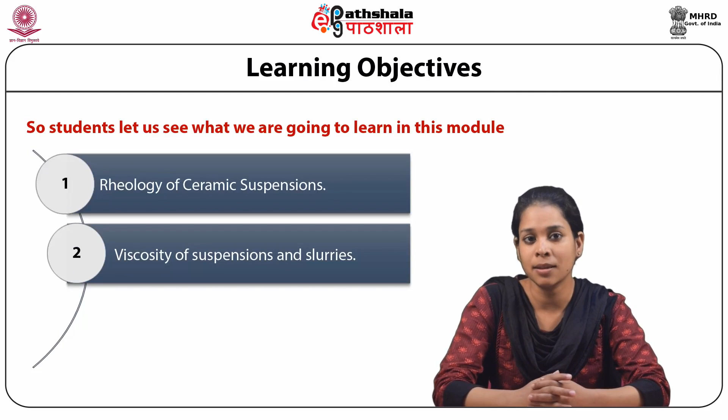So students, let us see what we are going to learn in this module. First we will discuss rheology of ceramic suspensions. Then we will discuss viscosity of suspensions and slurries. And lastly, we will discuss ceramic forming by casting.

Before moving into this module, we discussed in the previous module regarding dry pressing. Dry pressing is a common method to form ceramic shapes, where dry powder containing small amount of binder is used. The ceramic shapes can also be produced from several other techniques.

One of them is the casting process, in which slurry of ceramic particles is used to cast the required shape in a porous mold. This technique can produce complex shapes as well as massive refractory shapes, and it is also used for advanced ceramics because of the ability to control agglomerates and achieve uniform mixing of all the additives.

Other than that, there are various techniques available for shaping a paste of ceramic powder, including extrusion and injection molding. These forming techniques are discussed in this module and we will discuss them one by one.

First we will talk about rheology of ceramic suspensions. Rheology concerns itself with the flow and deformation of materials. It is of great importance in the casting process. The parameter most commonly measured in rheological measurements is the viscosity.

In ceramic processing with suspensions, slurries and pastes, it is essential to know the rheology. Rheology is important in processing as well as in operations such as storing, pumping, transporting, mixing, etc. of a ceramic system. A ceramic system such as suspension or slurry is a complex system. The rheological behavior of such a system depends upon the particle size, concentration of particles in the suspension, the interaction present between the particles, and other factors.

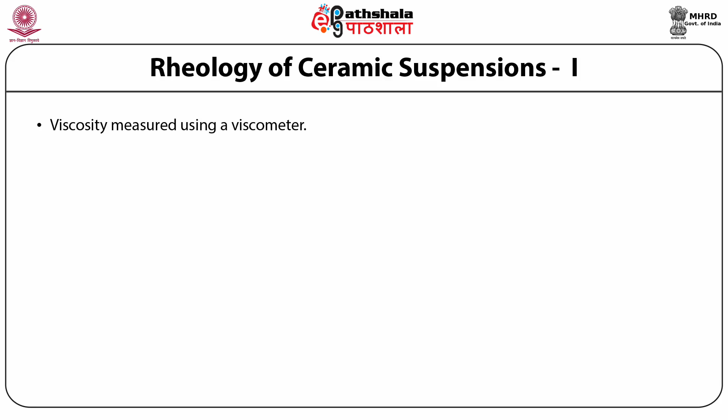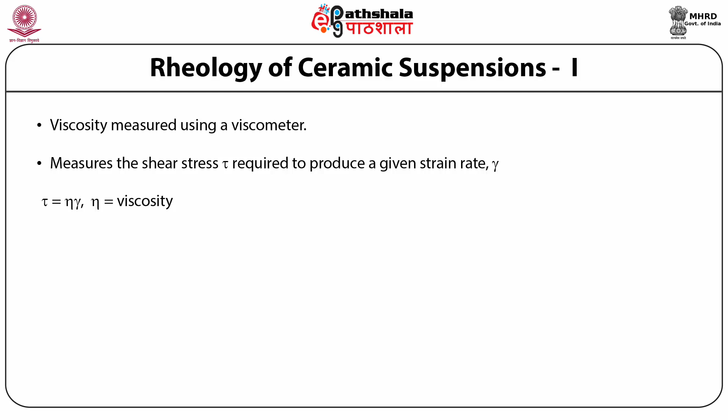There are different types of rheological behavior in ceramic suspensions. The viscosity of a suspension is measured using a viscometer. The shear rate used for measuring viscosity can be varied. For a given shear rate, a shear stress is applied by the viscometer. The ratio of the shear stress to the strain rate is called the viscosity, given as tau equals eta gamma dot, where tau is the shear stress and gamma dot is the strain rate.

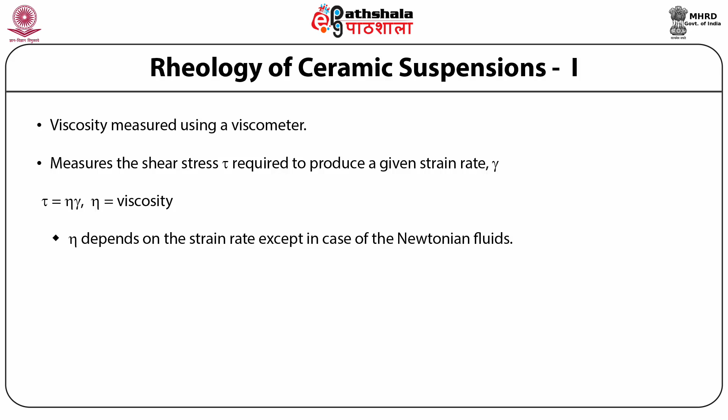It should be noted that the viscosity eta is generally a function of the strain rate, except in one case, which is discussed in the next slide.

Now, the rheology of ceramic suspension can be Newtonian type also. The Newtonian viscous behavior is discussed here. When the shear stress is directly proportional to the strain rate at all strain rates, and the constant of proportionality, the viscosity, does not change with strain rate, then the behavior of the fluid is called Newtonian viscous behavior. In this case, a plot of strain rate versus stress is a straight line. Such behavior is found in pure liquids and in dilute suspensions.

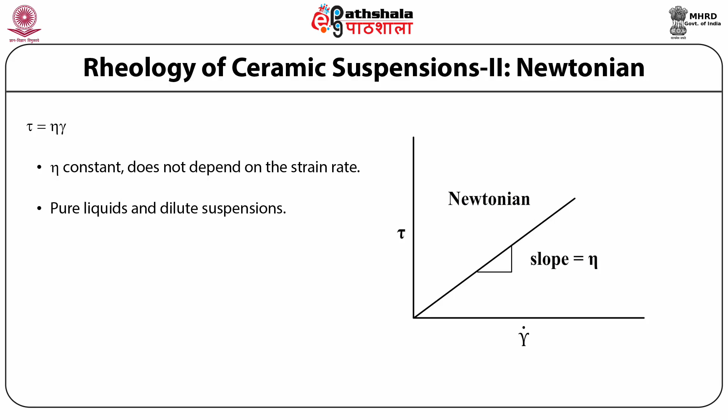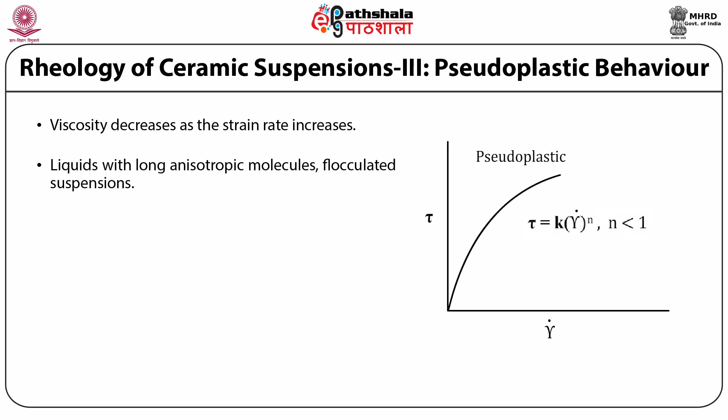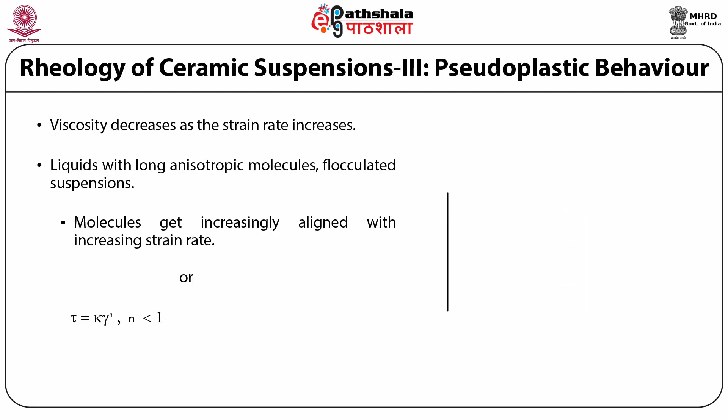This behavior is found in liquids with long anisotropic molecules, suspensions with long particles, and in flocculated suspensions. As the shear stress increases, the molecules or particles get aligned in the flow direction and the strain rate increases. This behavior can also be described by the power law, stated as tau equals k into gamma dot to the power n, where n is always less than 1.

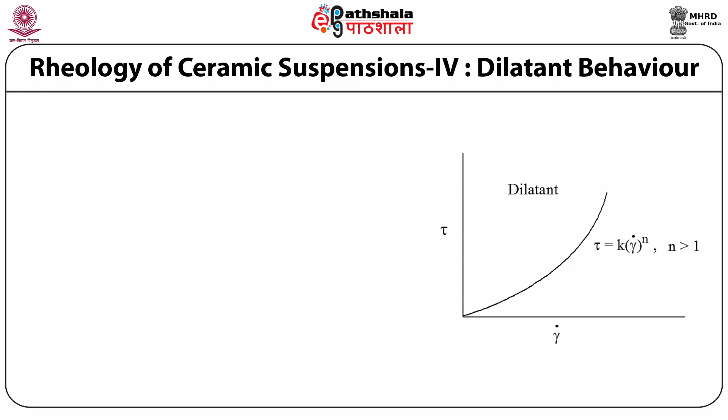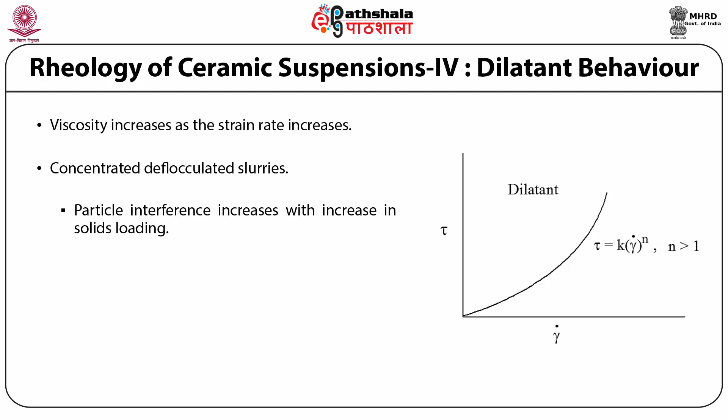Now the next behavior is dilatant behavior. Here the apparent viscosity, eta A, increases with increasing strain rate, so that the slope of the strain rate versus shear stress plot increases with increasing strain rate, as can be seen from this figure. This behavior is characteristic of concentrated deflocculated slurries. With increasing strain rate, the particle interference increases, leading to an increase in the viscosity. This behavior can also be described by the power law, tau equals k into gamma dot to the power n, with n greater than 1.

In all the cases which we have mentioned earlier, sometimes the plot does not start at the origin but starts at a finite value of the shear stress.

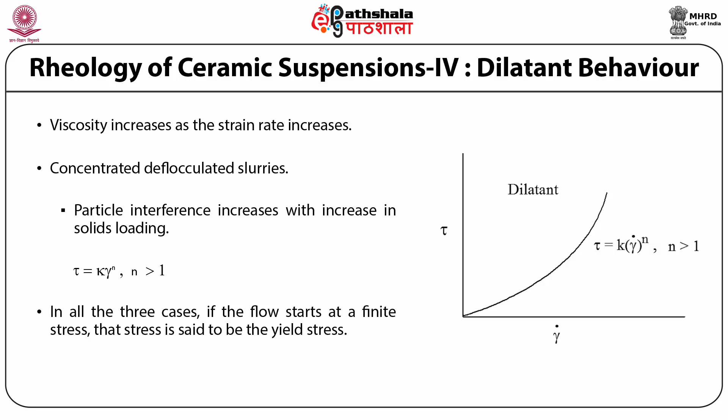The strain rate remains 0 until the shear stress increases above a certain value. This value of shear stress is called the yield stress.

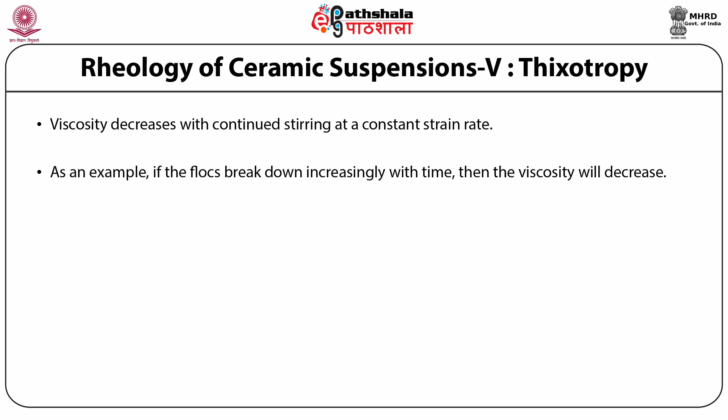Now the term thixotropy. What is thixotropy? Thixotropy is the decrease in viscosity with time while stirring at a constant strain rate. An example is flocculated suspensions, in which the flocs break with time during stirring, and if the flocs break down increasingly with time, then the viscosity will also decrease.

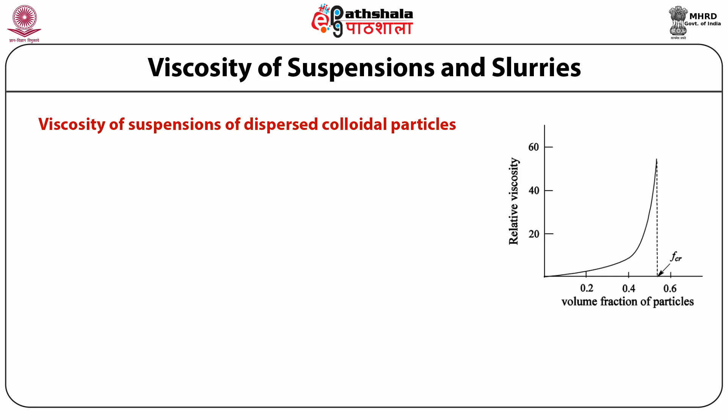In this case, a relative viscosity eta R can be defined as the ratio of the viscosity of the suspension to that of the pure liquid, given as eta R, the relative viscosity, equals the ratio of eta suspension and eta liquid.

For a very dilute suspension of non-interacting spheres in a Newtonian fluid, the relative viscosity is given as eta R equals 1 plus 2.5 times F, where F is the volume fraction of the particles. The increase in viscosity with increasing F is caused by the dissipation of energy as the liquid moves around the particles.

This equation is known as Einstein's equation. Now, for non-spherical particles, the constant in this equation, eta R equals 1 plus 2.5F, the constant is more than 2.5. It will not be 2.5.

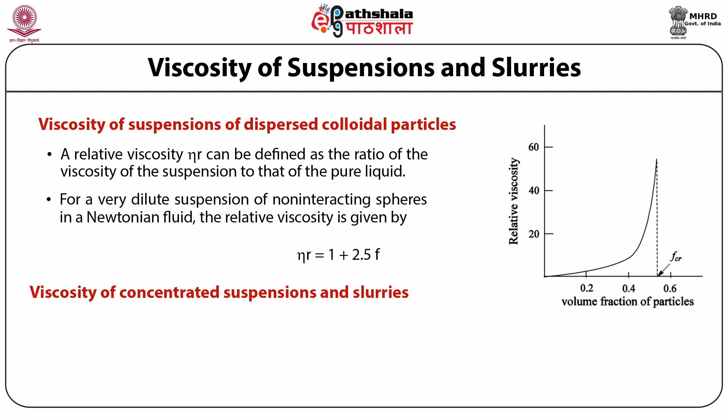Now we will discuss the second case, viscosity of concentrated suspensions and slurries. The equation described above for relative viscosity is valid for dilute suspensions. When the concentration of particle is greater than 5 to 10%, the interference between the particles causes the viscosity to increase rapidly.

The behavior of concentrated suspensions and slurries can be described by an empirical equation given as eta r equals (1 minus F divided by FCR) to the power minus K times FCR, where FCR is the critical packing factor at which the flow is blocked and K is a parameter.

The behavior can be seen in this figure. For an aqueous suspension of latex spheres of diameter 0.7 micrometer, it was found that K is 2.7, and FCR is 0.57 to 0.68 depending on the shear rate.

The same expression describes the behavior of slurries which may have particle size distribution ranging from colloidal to coarse particles. So a simple equation can be eta r equals 1 minus F to the power minus K. This equation is used sometimes.

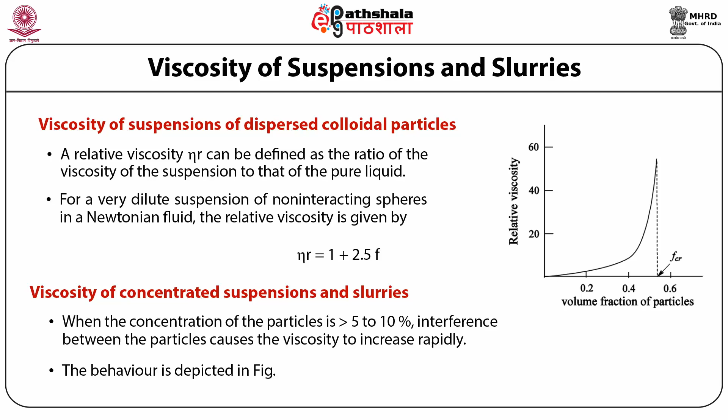A dilatant behavior can also be observed in concentrated slurries due to mutual particle interference, especially where a high repulsive interaction is present. A dilatant behavior makes the pumping and handling of the slurries difficult.

Now we will discuss the effect of the state of dispersion on viscosity. The viscosity increases as an initially dispersed system becomes more and more flocculated. An example is shown in this figure where the viscosity is plotted as a function of pH.

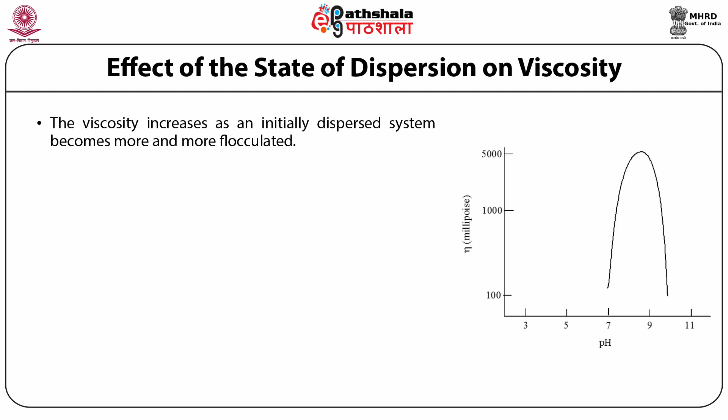Near the isoelectric point, the aggregation of the particles occurs. The increased torque required for this causes an increase

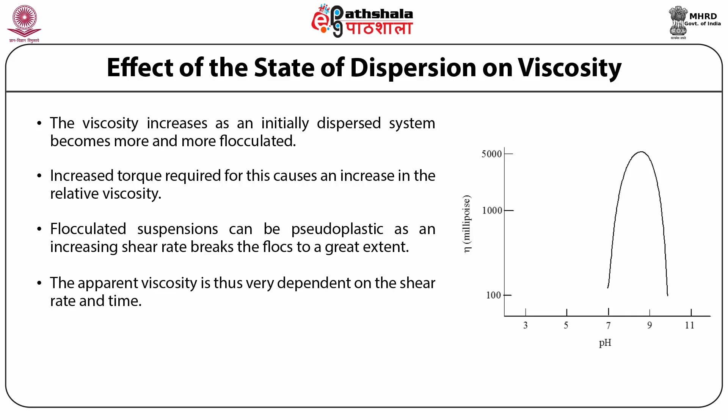in the relative viscosity. The flocculated suspensions can be pseudoplastic as an increasing shear rate breaks the flocks to a great extent. It can also be thixotropic if more and more flocks break with continued stirring. The apparent viscosity is therefore very much dependent upon the shear rate and time.

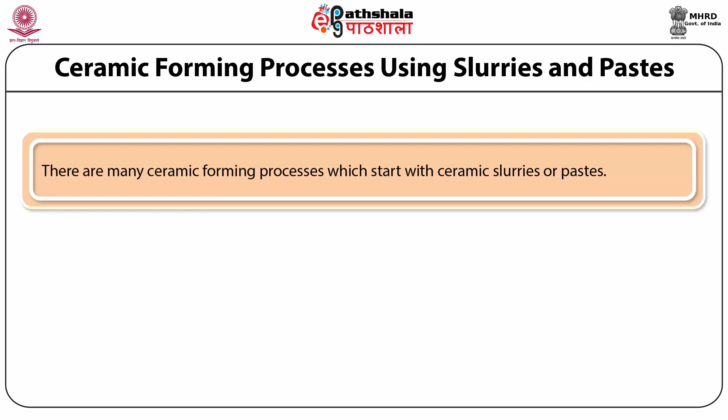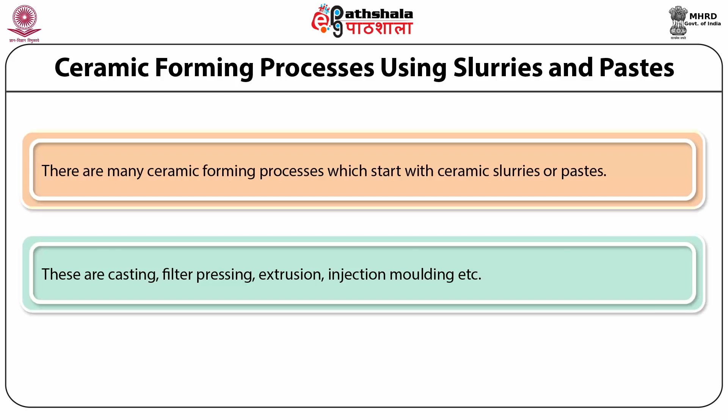Now we are directing towards the ceramic forming processes using slurries and paste. There are many ceramic forming processes which start with ceramic slurries or paste. These are casting, filter pressing, extrusion, injection molding, etc. We will discuss all of these one by one.

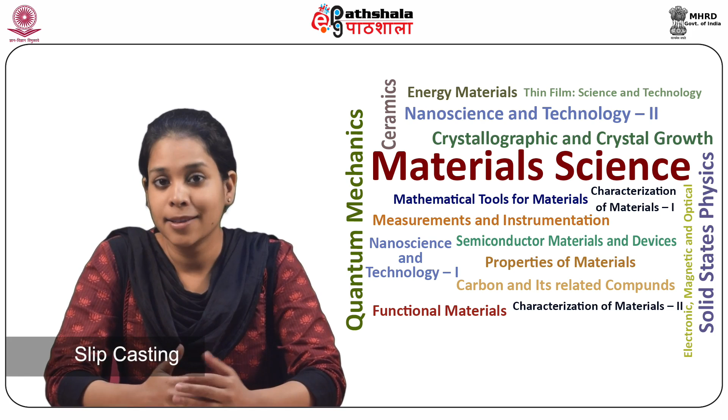So here comes slip casting. Slip casting is a technique used for manufacturing chemical porcelain ware, refractories having complex shapes or massive in size, sanitary wares, porous thermal insulations, bone china and so on.

Slip casting is also used for high performance ceramics with complex shapes because of the ease of controlling the agglomerates, better mixing of the additives in the slurry, and low investment.

The process essentially consists of preparing slurry of the ceramic to be used and pouring it in a porous mold. The liquid is slowly sucked out through the pores of the mold due to capillary action to the external surface where it evaporates. A cake is formed adjacent to the internal surface of the mold.

The remaining slurry can be poured out of the mold after the required thickness of the cake has formed. This complete process is called drain casting. So we will start with slip casting.

Alternatively, the slurry is not poured out and the casting process is allowed to proceed to completion, at the end of which a solid body with a pipe running through its center is produced.

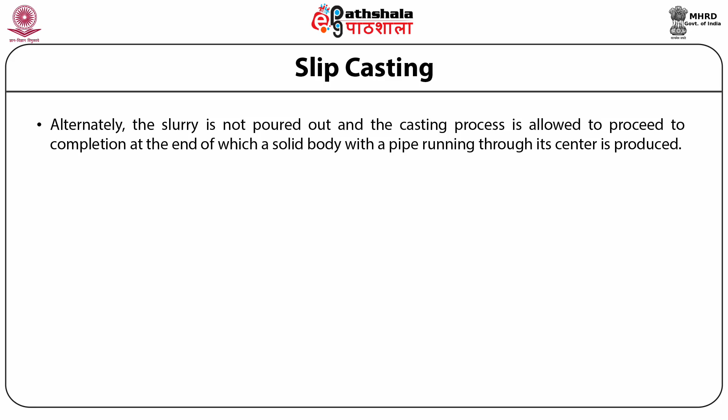After the casting process is complete, the separation of the cast from the mold occurs due to the drying shrinkage of the cast. It may also be effected by blowing air through the mold from the outside.

The casting time may range from 1 hour for a porcelain part with a thin wall to several weeks for a refractory cast of thickness of 30 centimeters. The casting time may be reduced by pressure casting or vacuum casting.

The slurry of slip casting can be formulated very carefully to achieve several objectives. These include: the casting rate should be reasonably fast, the cast should have adequate strength for handling subsequent to drying after removal from the mold. Another is the level of porosity in the cast should be as desired. And the last one is the cast should have uniform thickness.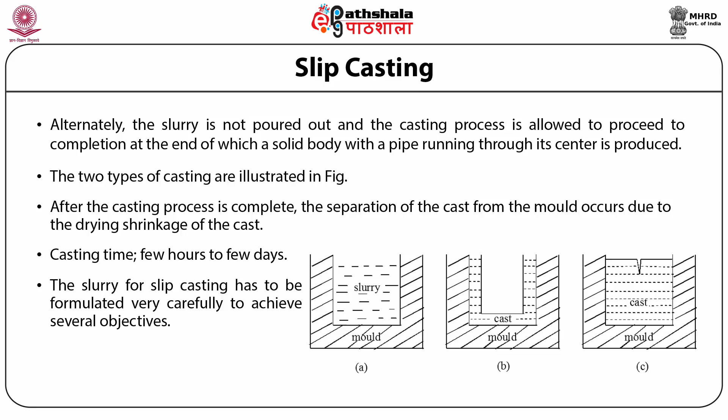Now there are some considerations which we should keep in mind in slip casting. Some factors considered while formulating a slurry for slip casting are: first, a large amount of fine particles in the slurry will produce a cake that has low porosity, and so the casting rate will be slow and non-uniform. To avoid this, the slurry can be partially flocculated.

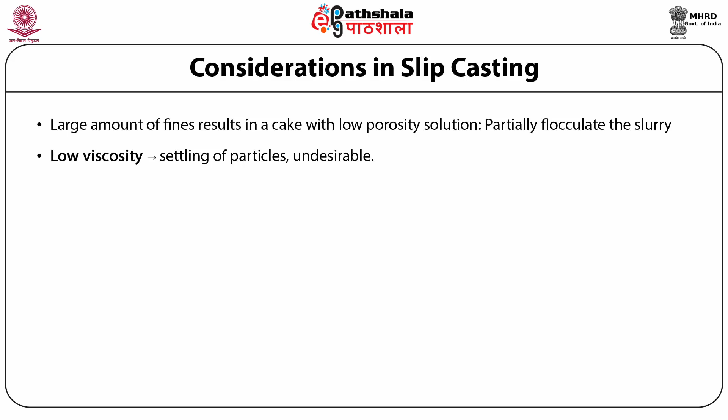Second, if the viscosity is too low, the particles would tend to settle to the bottom and the available casting time would be small. In slurries with high viscosity, larger particles can be accommodated.

Third, it is desirable to keep the solid loading in the slurry as high as possible so that less liquid has to be removed. The solid loading depends on the thickness of the double layer around each particle. In a highly deflocculated slurry with fine particles, with each particle having a double layer, the particles cannot be brought closer than a certain distance, and so the solid loading is limited.

Fourth, for drain casting, the viscosity should be low, that is less than 1 Pascal second, while it can be greater than 100 Pascal second for solid casting.

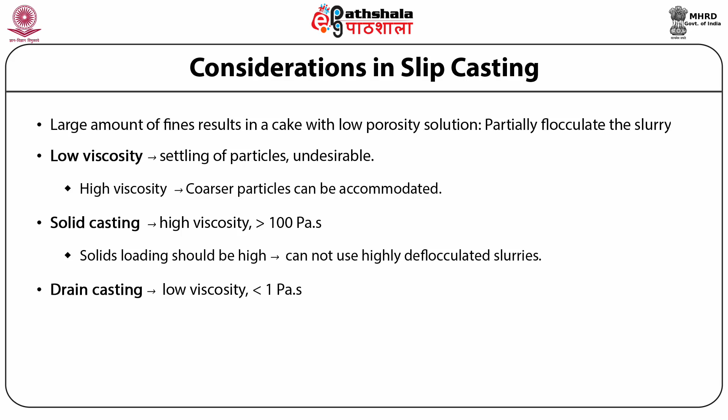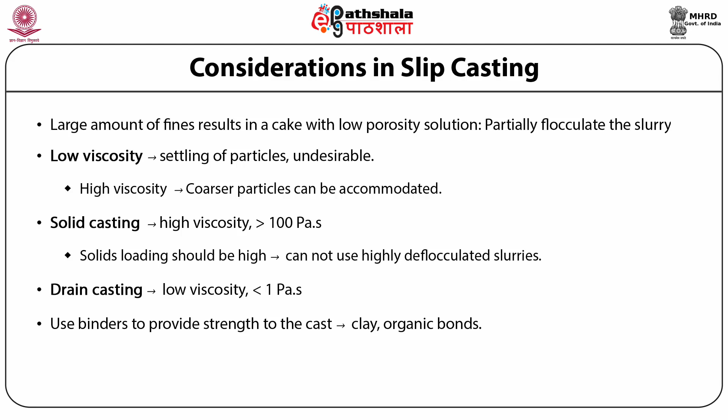And the last one is the binders are used to provide strength to the cast. Most often, clay is used as a binder. Organic binders of medium molecular weight or inorganic binders are also used. A mixture of binders can also be used instead of clays.

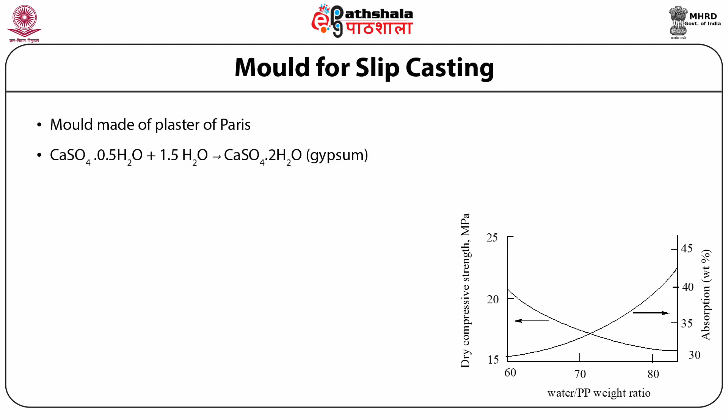The mold is commonly made from plaster of Paris, that is PP, which is partially hydrated calcium sulfate. On addition of water, it gets hydrated to gypsum, and the equation is written as follows: CaSO4.0.5H2O plus 1.5 times H2O gives CaSO4.2H2O, which is gypsum. The gypsum forms in the form of interpenetrating needles and plates and produces a mold with adequate strength.

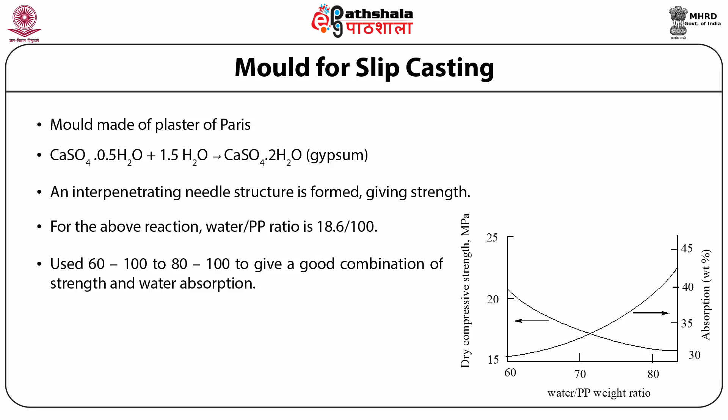The water to PP ratio according to the above reaction is 18.6 by 100. So a range of 60 by 100 to 80 by 100 is used to produce the mold to give adequate porosity. The variation of the strength of the mold and its water absorption capacity with water to plaster ratio is also shown in this figure.

The liquid being removed from the slurry has to pass through the cake which forms on the wall of the mold. The cake acts as a filter. The uniaxial flow rate through a filter is proportional to the difference in pressure, that is delta P, across the filter with thickness L and cross-sectional area A. So the equation becomes Q equals

Kd times A times delta P divided by L, which can also be written as Kp times A times delta P divided by eta times L, where Kd is the Darcy permeability coefficient and eta is the viscosity of filtrate. Moreover, Kp is the specific permeability.

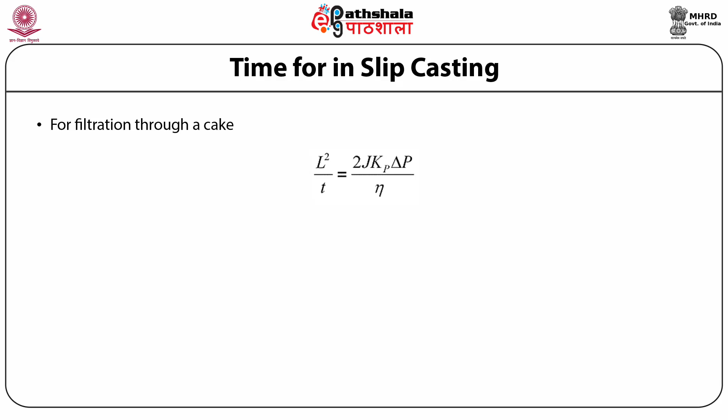For the filtration through a cake, one gets the formula as L squared by T equals 2 times J times Kp times delta P divided by eta, where L is the thickness of the cake produced in time T, J is the volume of the cake per unit volume of the filtrate.

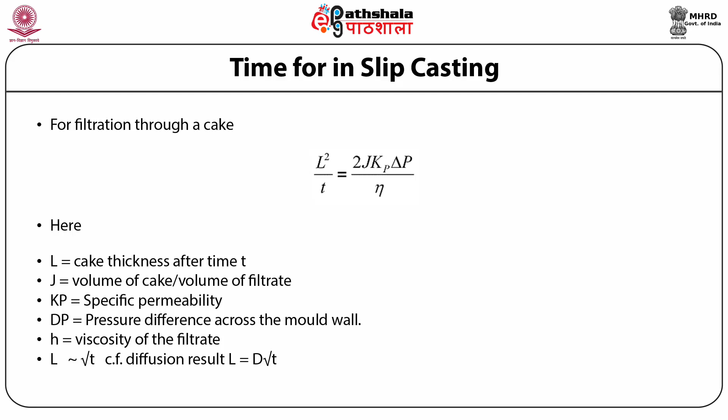This equation shows that the thickness of the cake increases as the square root of the time of casting, and it is similar to the diffusion equation, which is L equals D times root T, where L is the thickness through which the diffusion of the species takes place in time T and D is the diffusion coefficient.

Now the next process is tape casting.

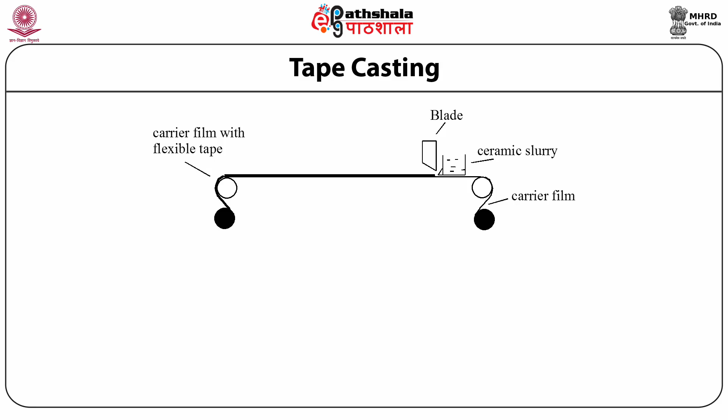The tape casting process is used to produce thin ceramic sheets, thin meaning less than 1 millimeter.

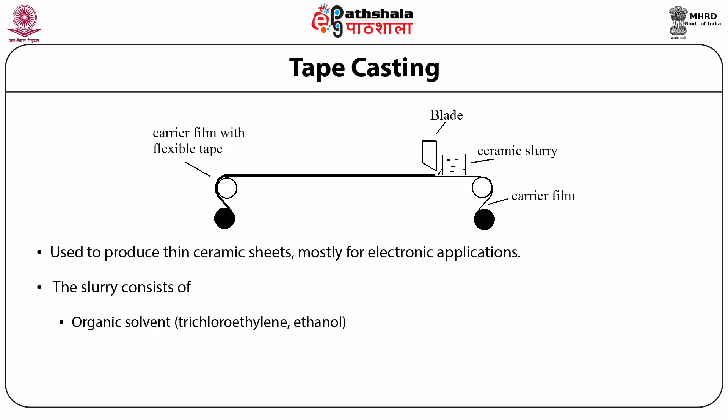A slurry made in organic solvents like trichloroethylene or ethanol, containing substantial amounts of organic binders such as menhaden fish oil, polyethylene glycol, etc., is poured over a flat surface. A sharp blade with a small clearance positioned over the surface is moved along it, as seen in this figure. This produces a thin layer of constant thickness, which can be controlled by controlling the gap between the blade and the casting surface.

Upon drying, the sheet becomes leather-like and can be slit, punched, etc. before sintering. This process is used to produce multi-layer capacitors, substrates for electronic packaging, etc.

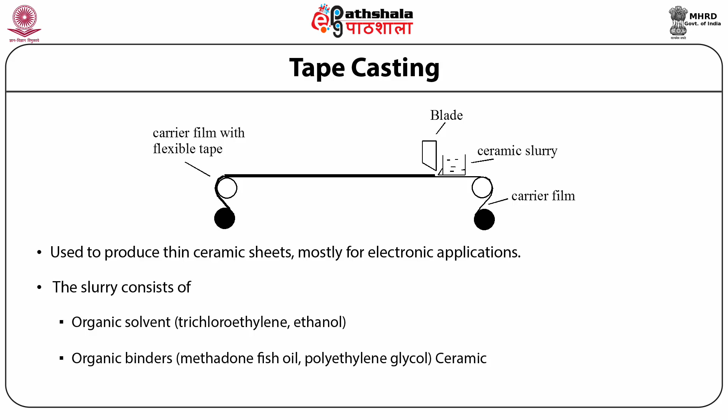Now we will discuss plastic forming. The mixture of clay and water produces a plastic mass, as we all know, which can be shaped by deforming into the desired shape.

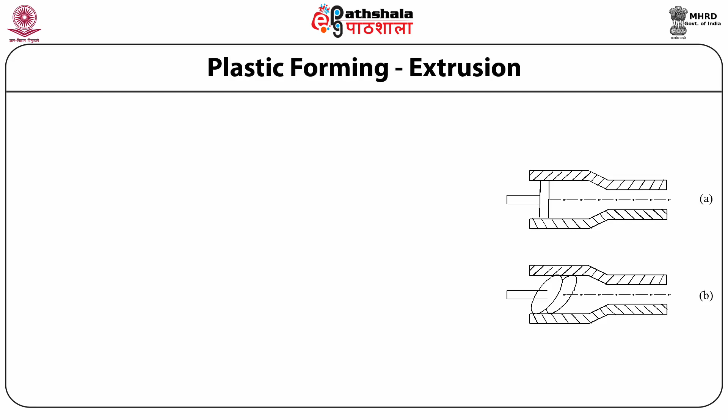Processes like extrusion, plastic pressing, and jiggering have been traditionally used to shape clay bodies. A plastic mass can also be produced by mixing any ceramic powder with clay or organic binders, and the same process can be used to produce parts of that ceramic.

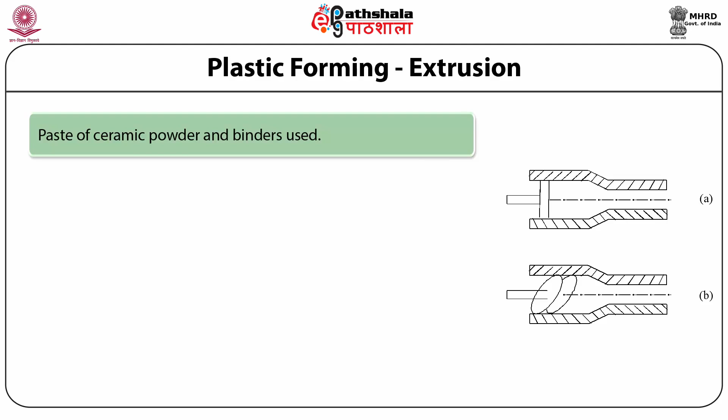So we will first discuss extrusion. In extrusion, the plastic mass is forced through a rigid die having a desired cross section. The process is used to produce long sections with a desired cross-sectional shape. Products made by extrusion include a variety of refractory and porcelain products of complex shapes such as hollow furnace tubes, honeycomb catalyst supports, transparent alumina tubes for lamps, flat substrates, etc.

So two types of equipment are used for extrusion. In one, the plastic mass is pushed by a piston inside a barrel and through a die, shown in figure A. This is a batch process in which feed material is fed intermittently. In the second type of equipment, the feed material is fed and carried in the barrel by a rotating screw called an auger, shown in figure B. The arrangement of the auger extruder is shown in this figure also.

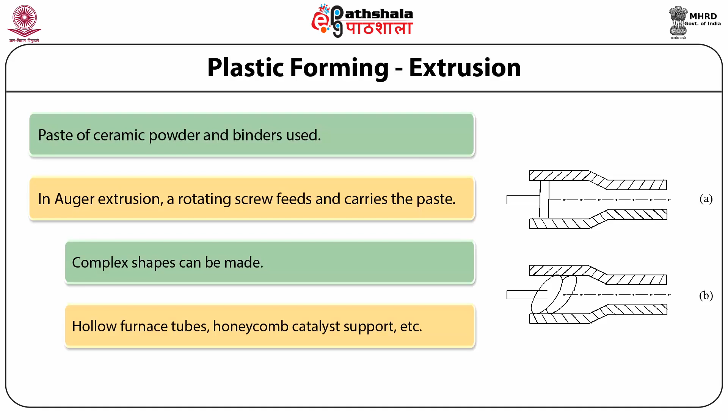The pressure used in a piston extruder is about 4 megapascal for porcelain bodies and about 15 megapascal for organically plasticized bodies. This can be compared to the pressure of about 200 megapascal which is used in dry pressing.

In injection molding, thermoplastics are preferred over thermosets because of factors such as storage stability and reusability of scrap. Two types of thermoplastics are generally used: one is called minor binder, which during post-forming removal of the polymer burns out earlier and provides pore channels for the escape of the major binder, which burns out later.

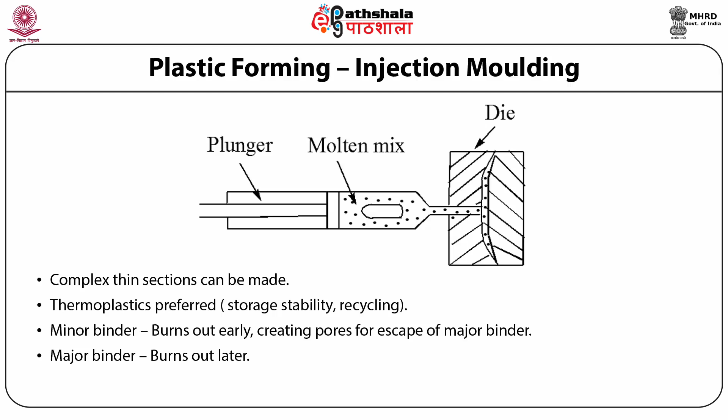In addition to the binders, a plasticizer, or lubricant, and a surfactant for particle wetting are also used. Examples of major binder include high molecular weight polyethylene, and an example of minor binder is paraffin wax, etc. The temperature used during injection molding is about 125 to 150 degrees Celsius, higher than the Tg of the major binder.

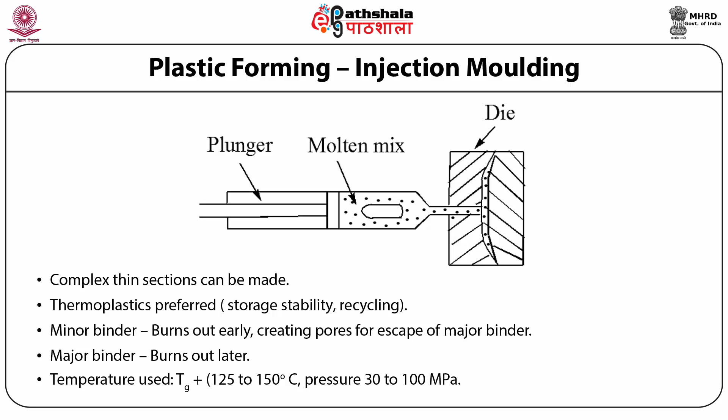The pressure used is 30 to 100 megapascal, and during injection molding, maintaining suitable temperature at each location is a very critical process. Parts with complex shapes, dimensionally accurate and with smooth surfaces, can be produced by injection molding. The tolerance in thickness is around 0.5 to 5 mm, and holes smaller than 1 mm can be produced with a tolerance of less than 0.1 mm.

So students, let's summarize what we have learned in this module. First we read about casting and plastic forming processes. Then we discussed the first process, casting, where we learned that rheology is very much important.

Next, we read about pseudoplastic behavior, in which viscosity decreases with strain rate, which is desirable for casting. In slip casting, a slurry is poured into a porous mold made of plaster of Paris. A cake forms, which is stripped off and fired to yield the ceramic part. The process is used for complex and large refractory shapes, sanitary wares, and so on.

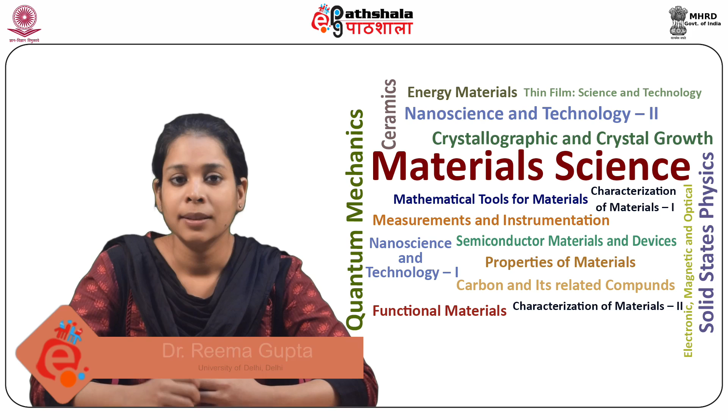Next we discussed extrusion, in which a paste of ceramic and binders is extruded through a die to make complex shapes such as honeycomb, catalyst supports, hollow tubes, etc. We also discussed that the injection molding process is very similar to that used in polymer processing. A paste of ceramic powder and up to 70% polymers is used, and thermoplastic polymers are preferred over others. Thank you.